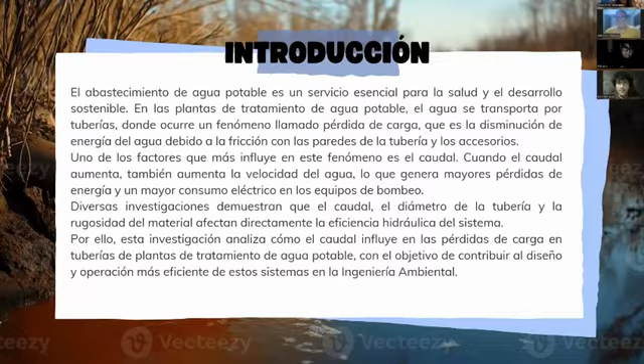General objective: to analyze the influence of flow rate on head loss in the piping of drinking water treatment plants, through the review and analysis of scientific literature, with the aim of understanding its effects on hydraulic efficiency and energy consumption of the system.

Specific objectives: identify the main hydraulic factors, examine the influence of flow rate on pressure losses, analyze the application of the Bernoulli equation, the Darcy-Weisbach equation, the Colebrook-White equation, and the Reynolds number. Justify the importance of properly selecting the flow rate and designing the pipe hydraulics.

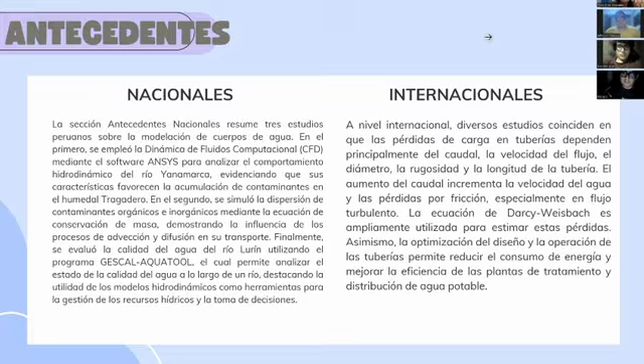In the international background, international studies show that head loss in pipes mainly depends on flow rate, flow velocity, pipe diameter, roughness, and pipe length. As the flow rate increases, friction loss also increases. The Darcy-Weisbach equation is widely used to estimate head loss, while proper hydraulic design helps reduce energy consumption and improve the efficiency of drinking water treatment and distribution.

Theoretical framework: fluid properties related to pipe flow. Density is the amount of mass contained in a given volume of fluid, expressed in kilograms per cubic meter. Flow rate is the volume of water passing through a pipe per unit of time. Pressure is the force exerted by fluids on the pipe walls per unit area.

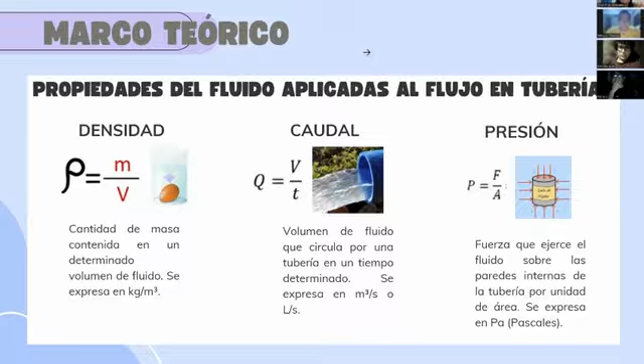Bernoulli equation: the Bernoulli equation describes the relation between pressure, velocity, and elevation in flowing fluids. In real piping systems, it is modified to include head loss caused by friction. This equation is widely used to analyze the hydraulic behavior of water distribution and treatment systems.

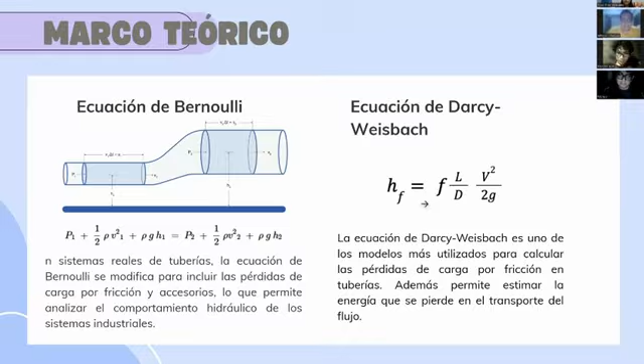The Darcy-Weisbach equation is one of the most widely used models for the calculation of frictional head loss in pipes. It also allows for estimation of energy loss during fluid transport.

The Colebrook-White equation allows for the determination of the friction factor in pipes with turbulent flow, taking into account the Reynolds number and the relative roughness of the pipe.

The Moody diagram is a graphic tool used to determine the friction factor based on the Reynolds number and the relative roughness of the pipe. It is used for simplified hydraulic analysis.

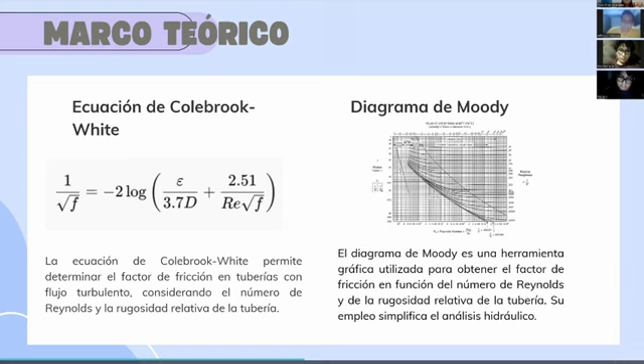Regarding the Reynolds number, it is a dimensionless parameter used to determine the flow regime of the fluid within a pipe. Its calculation makes it possible to establish whether the flow is laminar, transitional, or turbulent.

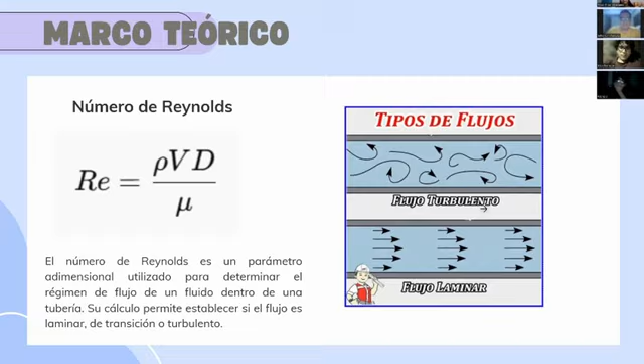Methods: analysis of the continuity equation, Bernoulli equation, Darcy-Weisbach equation, Colebrook-White equation, and Reynolds number. Procedure: search in academic databases, selection of studies based on inclusion criteria, extraction of key hydraulic information, and comparative analysis of the selected studies.

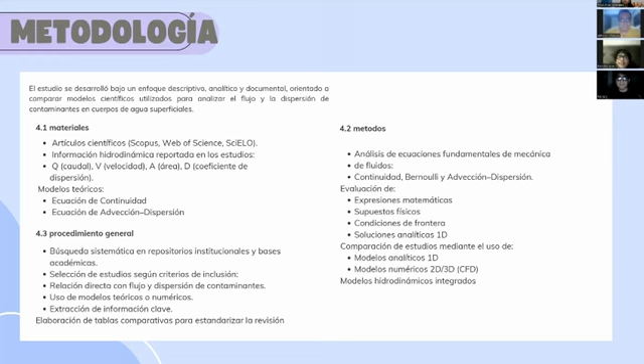Various studies on the influence of flow rate on head loss show that when the flow rate increases, the flow velocity also increases, and as a result, friction head loss in the pipes becomes greater. In addition, a higher flow rate increases the energy consumption of the pumping system, reducing the hydraulic efficiency of drinking water treatment plants. The studies agree that flow rate is one of the most important factors affecting the hydraulic performance of the system.

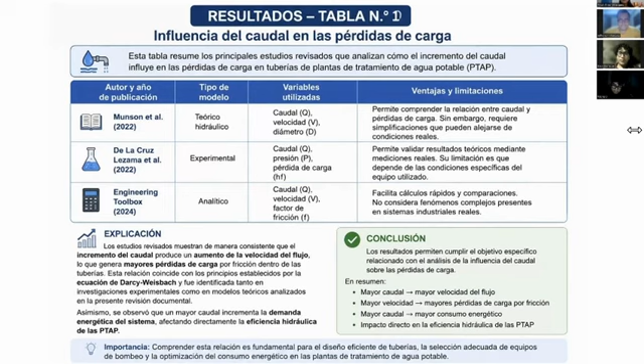Compares the main models used to analyze head loss. The results show that theoretical models explain the basic principles of fluid flow. Mathematical models use the Bernoulli, Darcy-Weisbach, and Colebrook-White equations.

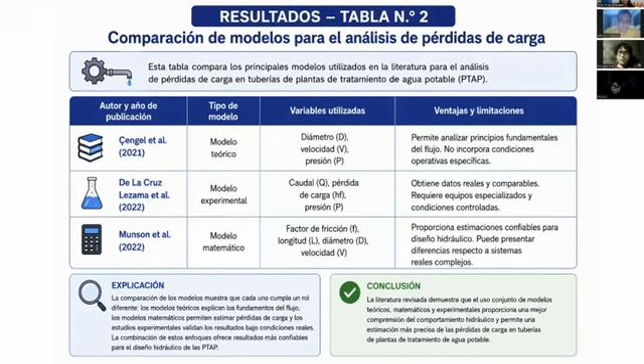These models allow engineers to calculate head loss, and experimental models verify this calculation under real operating conditions. Therefore, the review concludes that combining these approaches provides more reliable results for the hydraulic design of drinking water treatment plants.

Table 3 presents the main hydraulic variables affecting head loss. The results indicate that higher flow velocity increases friction; smaller pipe diameters produce greater energy loss, while rougher pipes increase flow resistance.

Greater pipe roughness increases the friction factor, and turbulent flow generates more head loss than laminar flow. Overall, the findings show that not only flow rate but also the hydraulic variables must be considered to achieve a more efficient system with lower energy consumption.

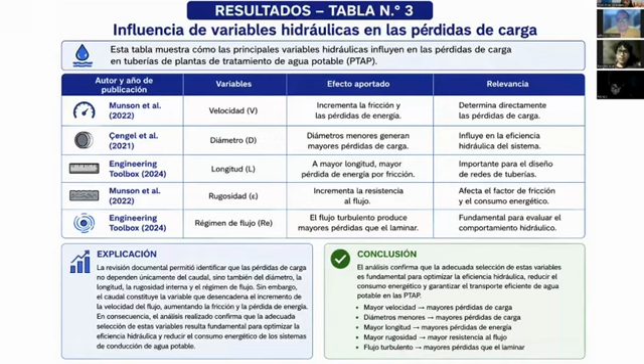The results showed that flow rate is one of the main factors influencing head loss in the pipelines of the treatment plants. This happens because as the flow rate increases, the water velocity also increases, moving faster and creating more friction against the inner walls of the pipe, causing greater energy loss and a decrease in system pressure.

These findings agree with the study conducted by Sudirman et al. in 2022, demonstrating that an increase in flow rate produces a significant increase in head loss and pressure loss. This confirms that flow velocity is a key factor affecting the hydraulic performance of pipelines. Another important finding is the influence of pipe diameter.

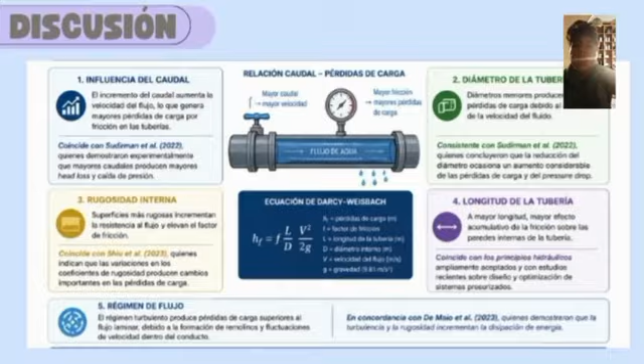When the diameter decreases, the water must flow faster to carry the same amount of volume. As a result, friction increases, leading to greater head loss. Therefore, selecting a proper pipe diameter is essential for designing an efficient hydraulic system.

The study also analyzed the effect of internal pipe roughness. Rougher pipe surfaces create greater resistance to water flow, increasing the friction factor and consequently head loss. We highlight the importance of proper maintenance and selecting suitable pipe materials.

In addition, pipe length has a direct effect on head loss. The longer the pipeline, the greater the distance traveled by the water, resulting in more friction and a higher loss of energy.

Finally, the research showed that flow type also plays an important role. Turbulent flow produces more energy dissipation than laminar flow, leading to higher head loss.

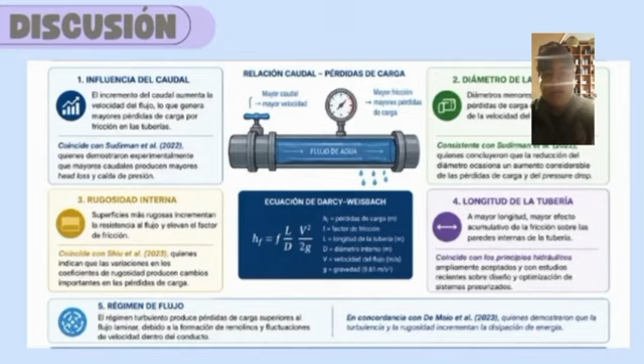Overall, the discussion confirmed that head loss depends not only on flow rate but also on pipe diameter, pipe length, internal roughness, and flow type. All these factors should be considered when designing or optimizing the treatment plant's pipelines to improve hydraulic efficiency.

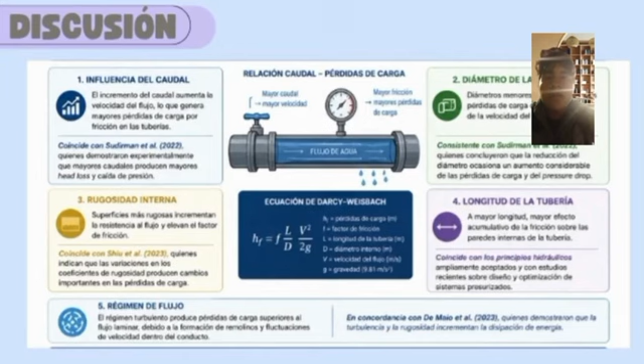In conclusion, we recommend choosing the right flow rate to reduce head loss and improve hydraulic efficiency. We also recommend using models like Bernoulli, Darcy-Weisbach, and Colebrook-White to calculate head loss and select the correct pipe diameter and pumping equipment.

In addition, regular pipe maintenance helps reduce roughness and prevent blockages. Further studies should include experiments or computer simulation software such as EPANET or ANSYS Fluent to confirm test results and improve the design of drinking water treatment plants.

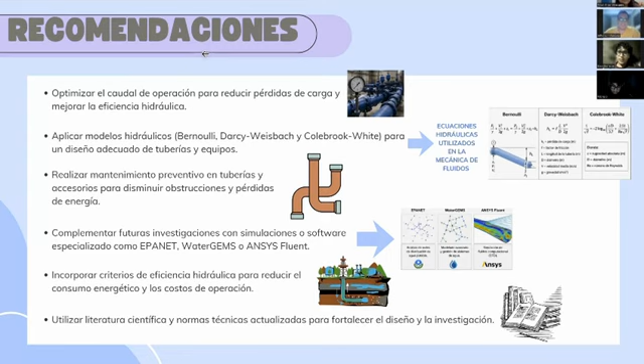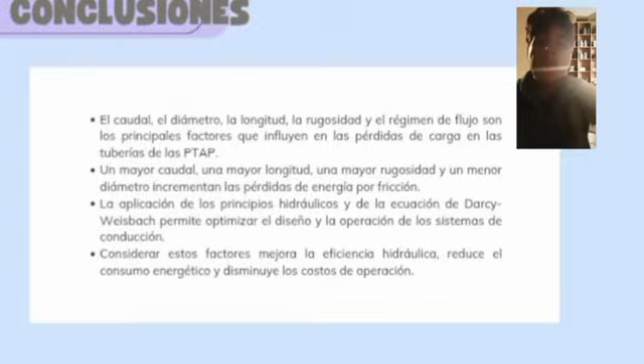In conclusion, the main objective of this research was achieved, as it was confirmed that flow has a significant influence on head loss in the pipelines of the treatment plants.

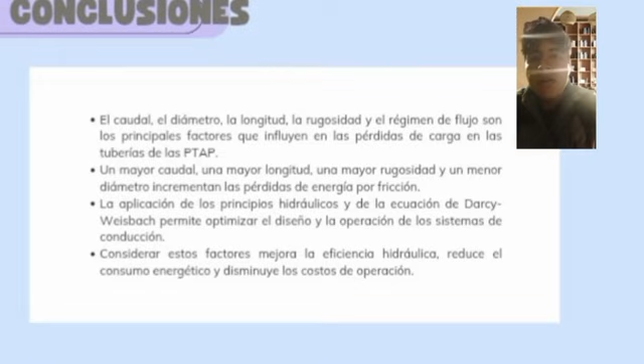The study also concludes that increasing the flow rate increases water velocity, which always increases friction inside the pipes, causing greater energy losses and lower system pressure.

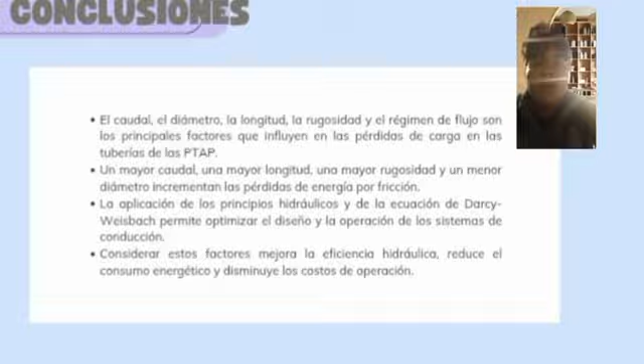Furthermore, variables such as pipe diameter, pipe length, internal roughness, and flow type also have a significant impact on hydraulic performance. Therefore, these variables should be analyzed together to achieve a more efficient hydraulic design.

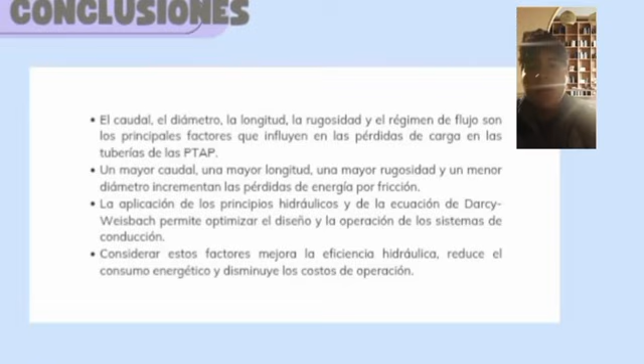The research also confirmed that equations such as the Darcy-Weisbach equation and the Reynolds number are fundamental tools for analyzing fluid flow and calculating velocity in the distribution system.

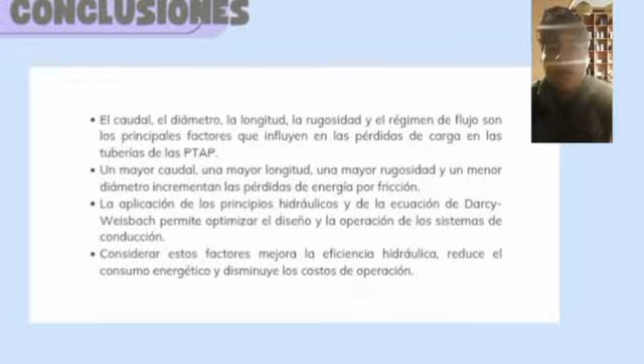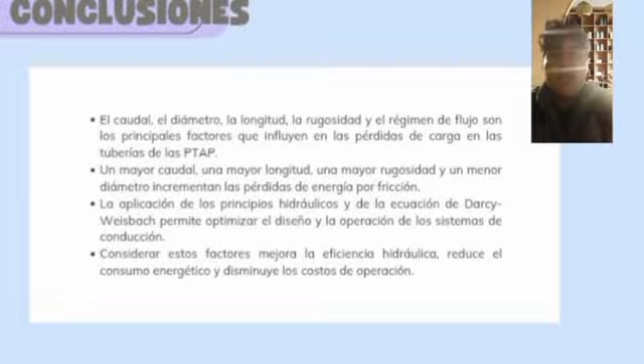Efficient hydraulic design reduces energy consumption, lowers operating costs, and improves the overall performance of treatment plants, ensuring safer and more reliable water supply. Thank you very much for your attention. I will be happy to answer any questions.